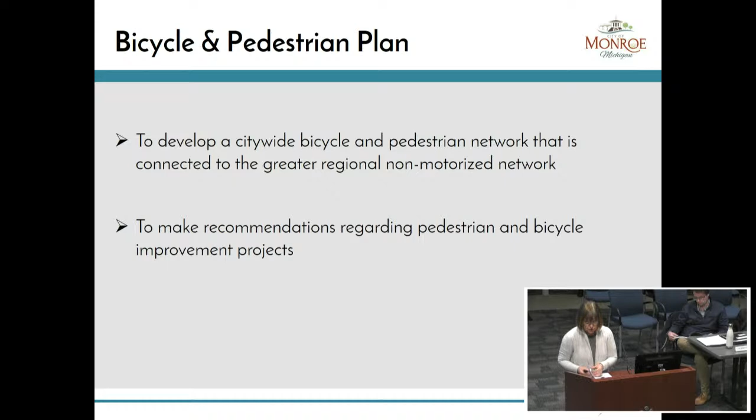5-year plans have a specific format they have to follow per the state. They need to include a community description. They need to describe the administrative structure of the city as far as how you operate parks and recreation services. And there needs to be public input. You have to set some goals and objectives and have an action plan for the 5 years.

This Parks and Recreation Master Plan is very similar to your last one, which I was also privileged to help you with. But it also brings together all the initiatives you did in the most recent past, including the update to the River Raisin Heritage Corridor East Master Plan, the Downtown Plan, the Riverwalk Improvement Plan, and brings together more up-to-date park development plans that you had started in 2017.

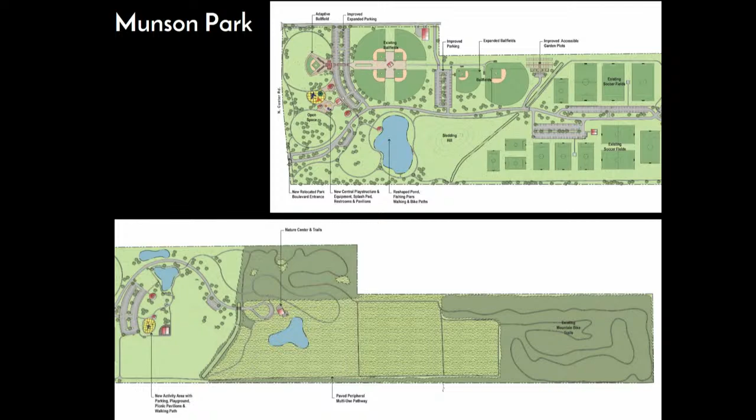Munson Park—I will not give you all the details, I know there's a lot of details in this plan, but if you have questions I'll gladly answer them. The plan for Munson is really to keep that open atmosphere at the entrance, to change that entrance and create more of a natural look, upgrade the playground including some adaptive ball fields, and create more trails in the back and in the park in general.

Soldiers and Sailors—expanding and extending that river walk along the river, connecting it to the River Raisin National Battlefield Park.

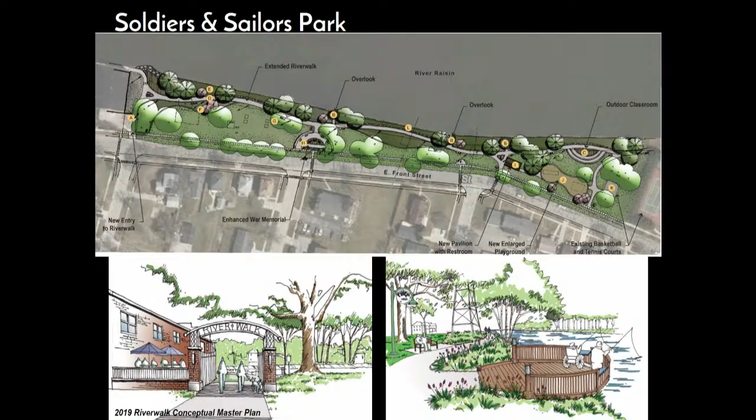There are also plans for your neighborhood parks and other pocket parks or River Raisin parks, and some of your parks that are not developed yet—so we have Mill Race, Manor, and Cappuccilli highlighted here.

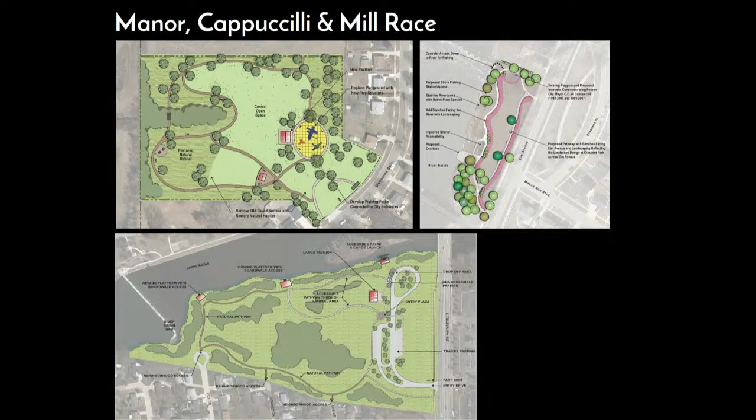And that's about it for the Parks and Rec plan. I hope that's enough for you, but I want to spend a little more time on your first citywide bicycle and pedestrian plan.

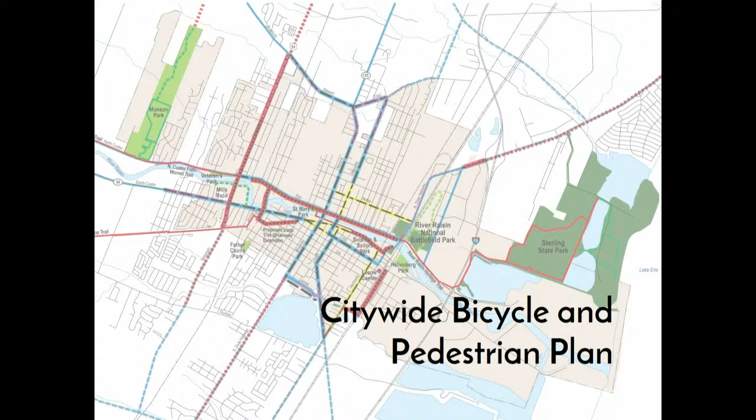In 2020, voters approved a 15-year millage for roads and trails. There's been a trail advisory committee, and I'm glad to see Peter was able to make it tonight—Peter is the chair of the trail advisory committee, and Andrew was able to serve as well. We've been meeting for about a year, going through this plan and planning for a citywide system in order to make recommendations to you to consider.

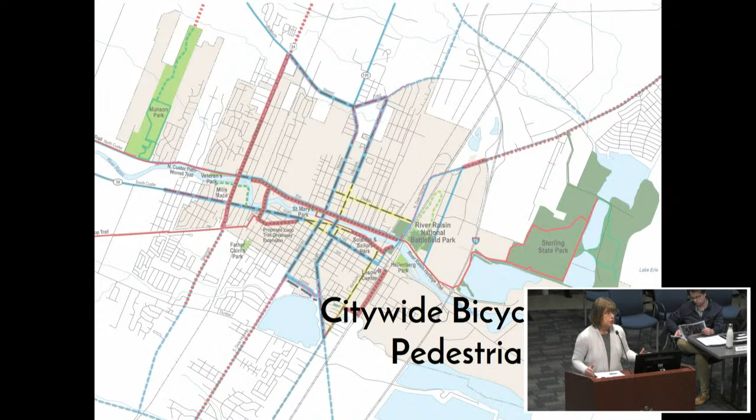So there's been a lot of work done here, and what I'm trying to highlight is just a few things. A key component of this was to make sure the city is connected to a regional network. Let me highlight that regional network a little bit for you.

But first, Monroe is truly unique, both in itself and regionally, because it has access not only to many local parks, but also to a state park, a national battlefield park, and an international wildlife refuge—all within city boundaries and all within walking and bicycling distance from most city residents.

When we start looking at Monroe, we are disjointed—we're not connected to that system. We do have a regional trail, and that regional trail is recognized as the River Raisin Heritage Trail.

In looking at each of those, you can see, for example, if you look at the River Raisin—and I'm going to invite you, you're looking at it, right? I didn't even realize that. The River Raisin Heritage Trail, you see the challenge that I was mentioning.

In the center of town, it's a sidewalk. It's not really a separate recreation trail, if you will, that's 10 feet wide. So there's a need to incorporate that, and you also don't have bicycle accommodations, and that needs to be said. I do ride there quite a bit myself, and you end up riding on a sidewalk because I'm way too scared to go on the road, frankly. But some people do ride on the road, and they are brave.

If you look at the Monroe Loop Trail, it starts at Munson Park and ends at Rossler and Fifth. Continuing the Loop Trail and connecting it through to downtown is something that's really a need.

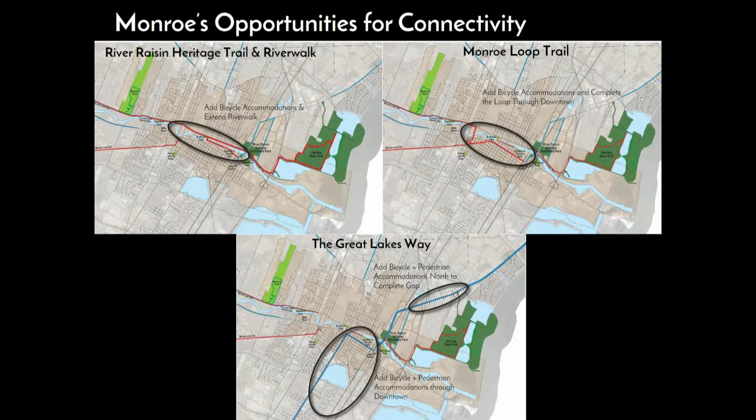As part of that effort, we did a survey of residents, for both the parks and the bicycle improvement plan. We found out a few things, and those are there for you to see, and they're also in the report that was distributed.

Generally, people want bike lanes. That was pretty clear—they want bike lanes in certain places through downtown, but everywhere was something I read quite a bit, along the river, and on dedicated off-road path and protected bike lanes. I think most people want a safe way to do bicycling in town.

We started looking at north-south corridors and east-west corridors, just highlighting a few that were mentioned. And other improvements we could do too: bike racks, hiking trails, continuing to allow bikes on sidewalks. That also speaks to how safe it is to be on the road. There was quite a bit of that conversation in our committee about how safe we felt about going on the road with on-street bicycle facilities.

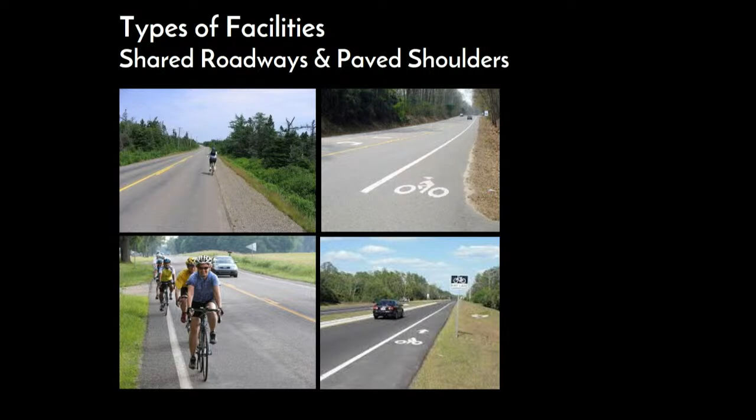As far as types of facilities, they come from many angles. The first one is no improvement whatsoever, and that's appropriate in certain areas, not in the city, primarily on rural roadways where there's very low traffic. That is safe if you have a little space, and hopefully a paved shoulder, which makes it safer because you have a dedicated space if you're right on the roadway.

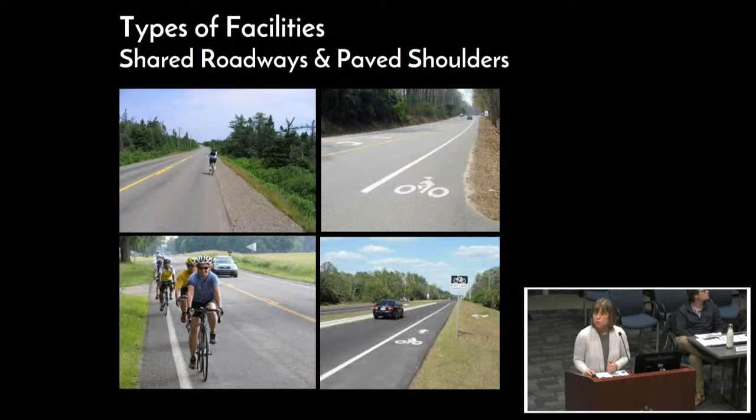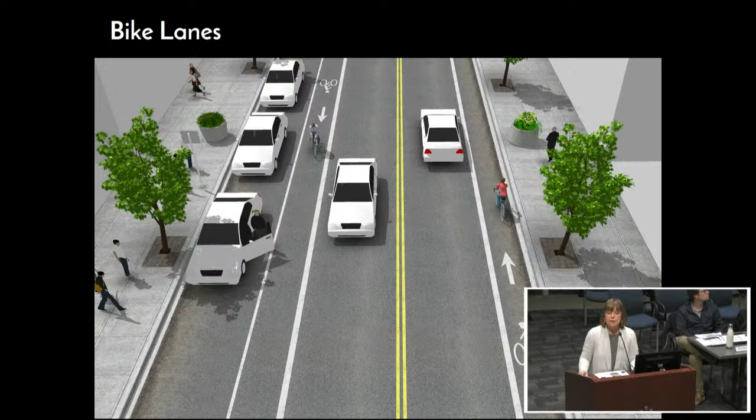But in cities, we start thinking about accommodating bicycles with bike lanes, and those have to be a certain width. Sometimes you mix parking with car traffic and bike lanes, as in the graphic I just showed.

There are different ways to make that safer. Rather than just having a straight bike lane, you can have protected bike lanes. They come up with ideas all the time about making this better, but it takes more room, so we have to be cognizant of that.

Buffered bike lanes are in the upper left, with bike lanes on the right. You see some kind of barrier that allows more separation, or planters, or just strictly a buffer. You notice the buffer is in between the traveling cars and the bike lane, and then you have the parking lane. In the lower example, you see there's parking, a buffer, and then the bike lane.

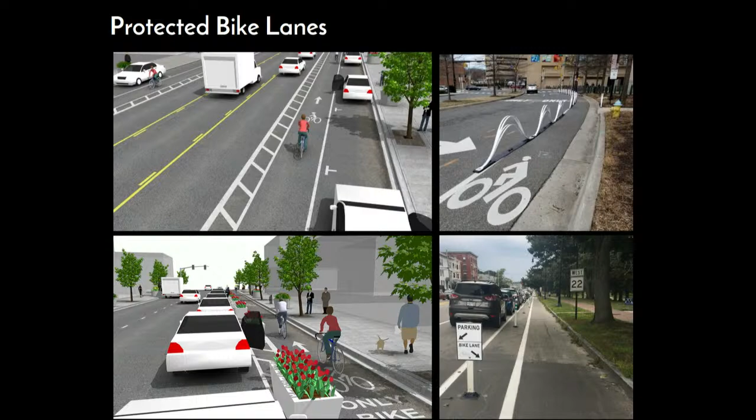So there are two types of protected bike lanes in that sense. If you look at the protected bike lane on the sidewalk, it's really an extension of the sidewalk, and that could be something you could imagine for Monroe Street. Wouldn't that be wonderful?

In addition to those protected areas for designated bicycles, there are areas where there's just no room for accommodating this. So you could think of a system that has bike lanes, but when you come to an intersection where there's a need for a turning lane, it becomes a shared lane situation. Those are accepted as far as standards, and the symbol you see on the pavement, that's what it is—it's a sharrow, a shared lane marking.

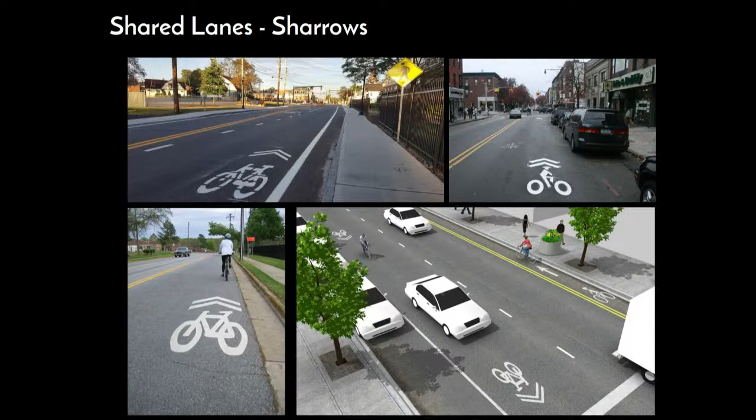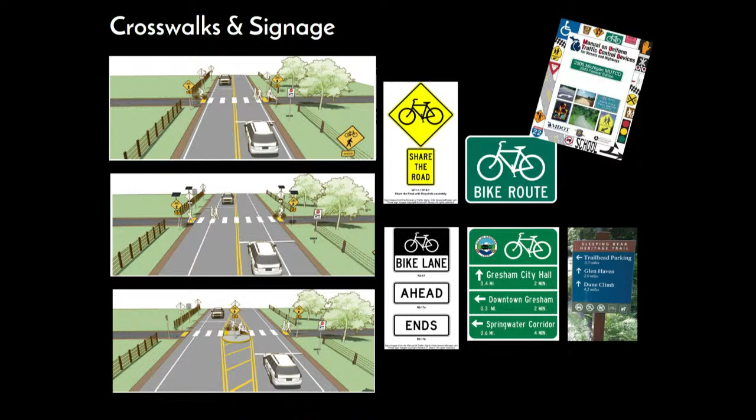In addition to on-street bicycle facilities, there's also other things you need to think about when looking at bicycle improvements—crosswalks, signage, and all those other amenities that need to happen around the city, plus bike racks, bike stops, bike stations, and the fix-it stations that you have in many places in the city right now.

So these were a little bit about standards. Now I'm going to talk about the plan itself, and the first thing we did is look at what we have.

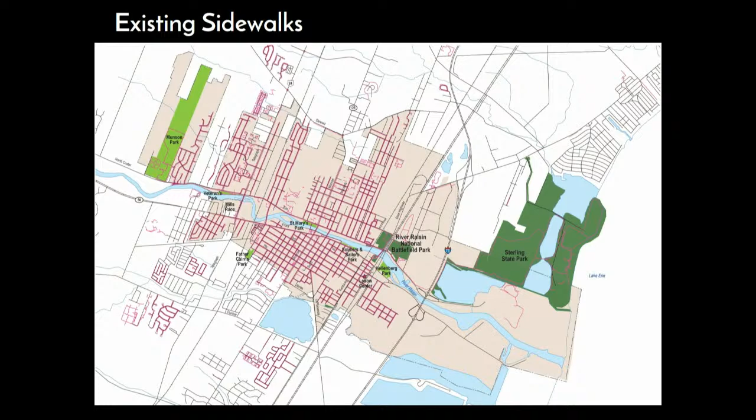That graphic, that plan, is really what you have in terms of existing sidewalks. You do see you have a great deal in Monroe. As far as bikeways and shared use paths, you do have some, highlighted in red here—the shared use paths are in red, and in blue are your bikeways. Within city limits, you really have a bike lane on North Dixie and Detroit Avenue, as you may know, and then on North Custer.

There are paved shoulders outside of town coming into town, and that's what you see over here, along M50, Monroe Street, and North Dixie. Then you have your river walk and the Monroe Loop Trail highlighted in red as if it's existing—it is almost existing.

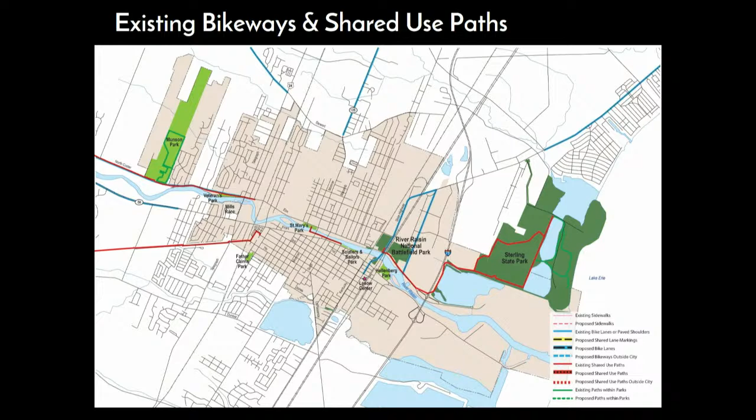The plan, the proposed bikeways—the plan itself is in two pieces, so the first one is the bikeways. What you see in bolder blue is what we are proposing. We're proposing to connect the dots, really, connect them and make sure the system is continuous and interconnected.

As far as shared use path, we are anticipating what other plans have proposed, as well as connecting dots again. So you have a planned shared use path along Telegraph, shown here. You also have plans for a greenway in the River Raisin Heritage Corridor East Master Plan, highlighted here. The other ones are part of connecting those opportunities I mentioned a little while ago, along Elm Avenue, and finalizing and continuing that loop—the Monroe Loop, downtown and on Rossler.

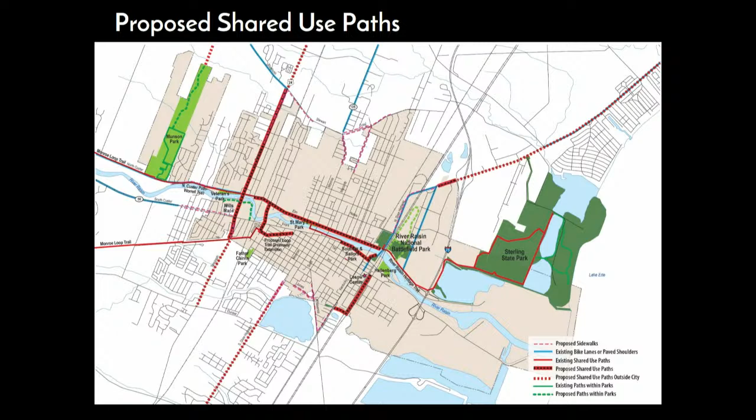So we looked at how that could be accommodated and the recommendations and how we can implement those within your existing street system. We measured the streets and looked at how we can put protected bike lanes on your existing roadways. So just a few examples: West Front, East First, and South Macomb can all accommodate protected bike lanes and two travel ways.

This has a trade-off that's pretty obvious to everyone here, I'm sure: we have to remove the parking on those streets. We have to say there's no on-street parking along those arteries.

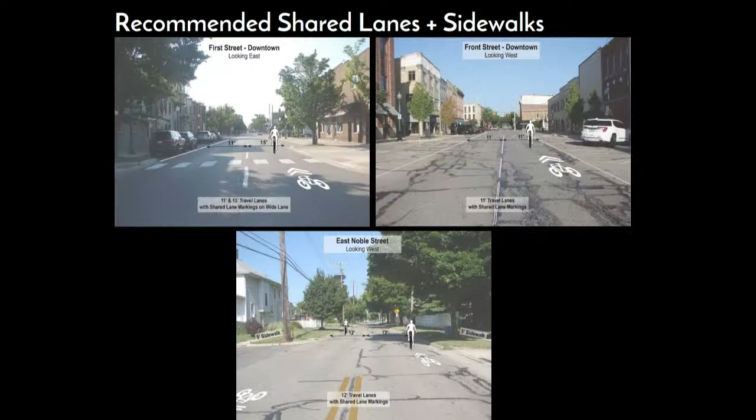Recommended shared lanes or sharrows, in addition to the existing sidewalks, are for places where we don't have the space, or where the traffic and speed are so low that it's safer to do so. So downtown is really right now thought of as a shared lane situation.

Noble Street is also thought of that way. What's happening downtown, I think, is going to be rethought in the near future in terms of the one-ways versus a two-way situation. When you do get there, I think it'll be incumbent with this complete streets mentality to think about how we're going to incorporate bike lanes or make it safer for bicyclists to go through our downtown.

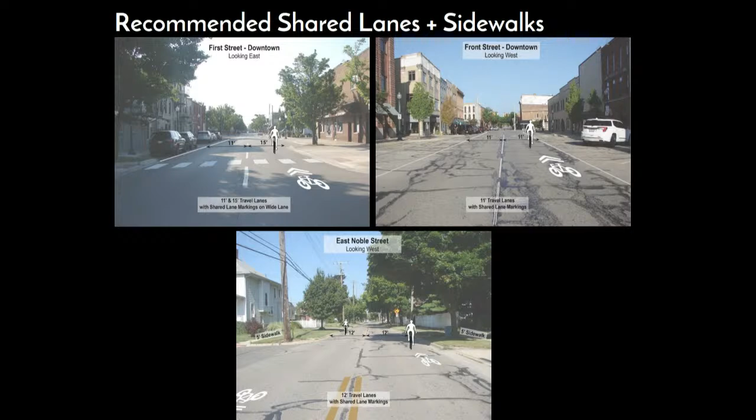Also, there are areas where we can and should afford to have both bike lanes and a shared use path. There are people who will never, as I said a little while ago, go on the street on a bicycle—they just are not comfortable doing so. So I think we need situations where we offer both a shared use path along the edge of the road as well as on-street bicycling, so that you can have that happening.

You also need to think about that particularly with your River Raisin Heritage Trail, in terms of offering a continuous trail from the state park all the way to the Monroe Loop, et cetera, to make that a complete wide trail use.

And in fact, if you could afford 12 feet, that would be awesome, but many areas won't have that width. So you should think about 10 feet at least, more than just a strict 5-foot concrete path. That way you can have a mixture of use, with greater use by both pedestrians and bicyclists mixed together, because what we're trying to do is attract people here.

So those are situations where there's both bike lanes and a shared use path along Elm, connecting Rossler to the loop, both north and south of the river. Yeah, that's what I'm showing—in addition, there's a shared use path.

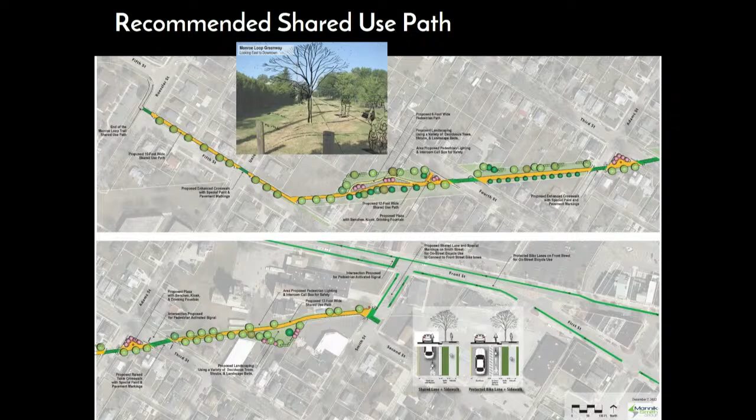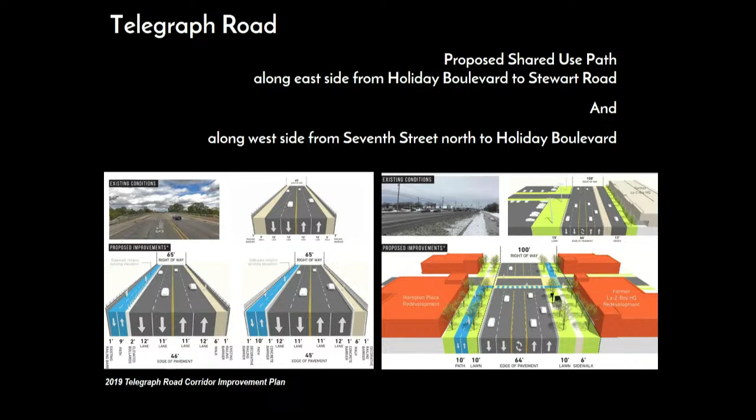Finally, I did talk about this too. Telegraph Road and Monroe Street are part of other plans. We didn't spend a whole lot of time thinking about that because it's already been planned—there is a plan for a shared use path on Telegraph Road, both south and north of the river, largely on the west side, crossing over at Holiday Boulevard and then going east to go north. Hopefully both Monroe and Frenchtown will come along with this plan and continue it both north and south.

Monroe Street has an option to create a bike lane there, and this is really what our committee would like to see.

What we'd like to see is the bike lane against the sidewalk, the idea of having the protected bike lane close to the pedestrian, then a buffer, then parking. This supposes you're on board with reducing the number of lanes through downtown, which in my opinion would be a great thing to do for Monroe.

So our priorities, and I've got only 3 slides, I hope I'm not taking too much of your time. First is to create those bikeways through town, connecting the dots.

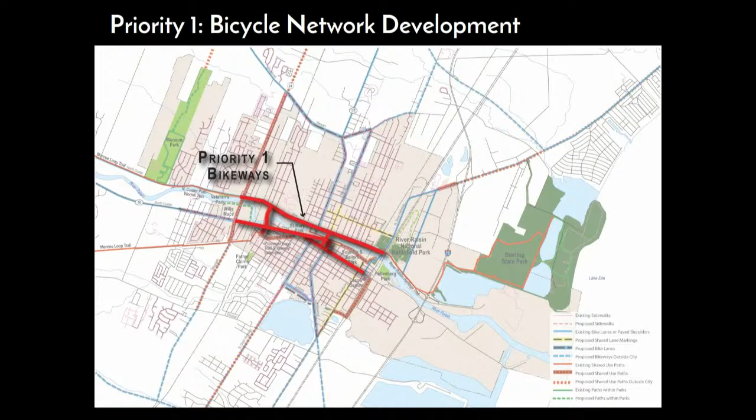Excuse me, could you go back to that previous picture? Sure, you've got Monroe Street there. Currently Monroe Street has two lanes going north, two lanes going south, and a turn lane.

Now, if I understand and read this correctly, you're proposing there would be only one lane going north and south, with a turning lane in the center, a bikeway, and still a parking lane. Is that correct? That is what's shown here.

That's part of the downtown plan. But what I'm suggesting is that we reverse the parking lane and the bike lane, so the bike lane is against the sidewalk, then a buffer, then a parking lane, then your 3-lane roadway with a center turn lane.

So you're trading 4 drive lanes for 2. Correct. The idea is not to move traffic faster, the opposite. Well, I can assure you with 2 lanes you're going to slow traffic down. Yes, and in fact it was pointed out, is that your intent? The intent is to accommodate bicycles.

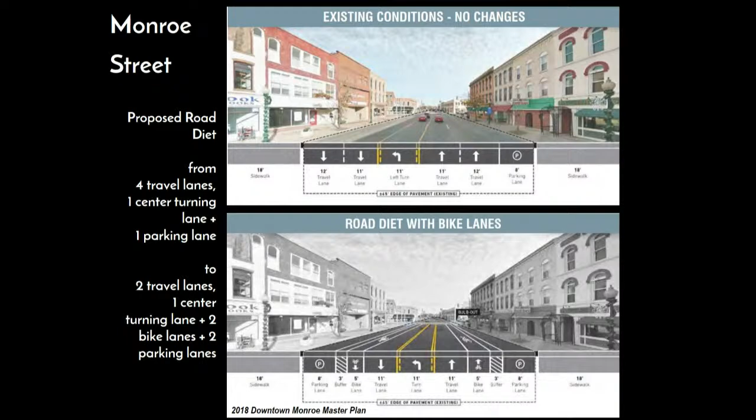There will be reaction, no question. But I do think there are ways to implement some of these changes by trying it out, seeing if it works, and adjusting and learning from what we try. But if we don't try anything, we're not changing, and I don't think that's good either.

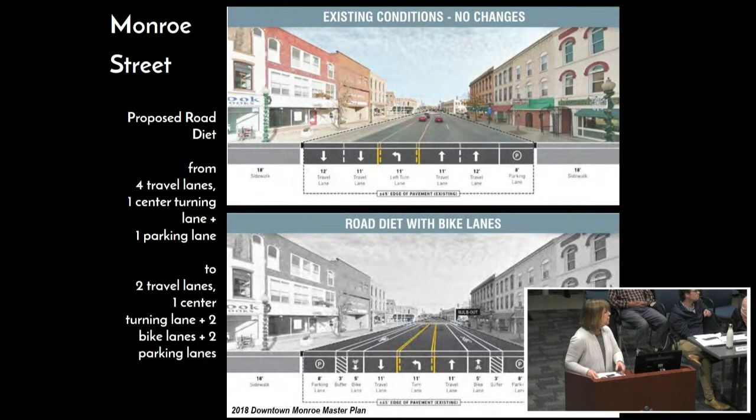So just moving on, I want to focus on the recommendations of the plans. Our number one priority was really to create those bikeways, connecting them together and creating a city system that's interconnected for bicyclists to use.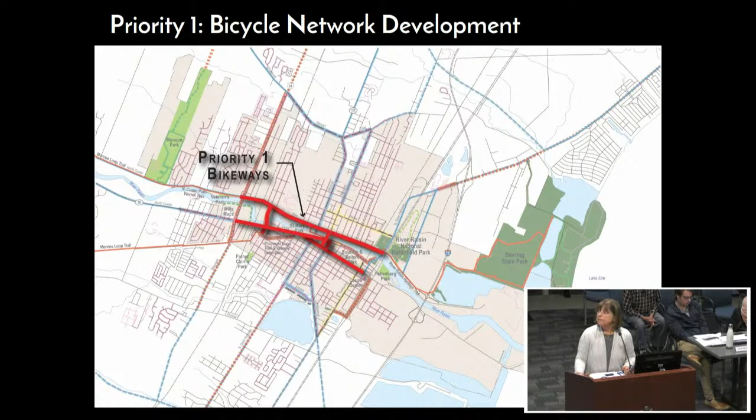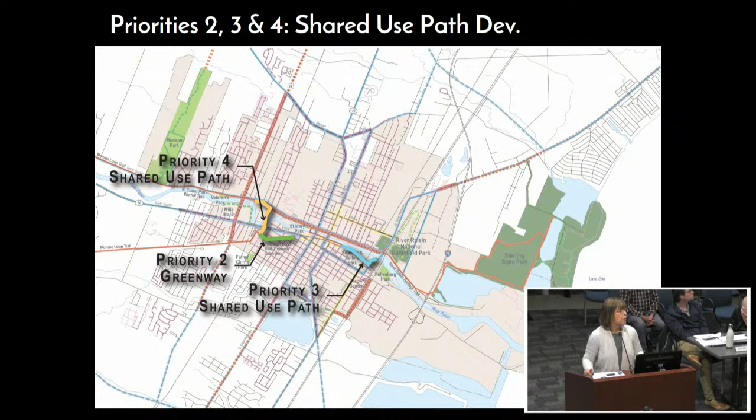So that's it as far as my presentation. I do want to say that I will be coming back to both the Plan Commission and City Council in January. This is just the first approach, and as part of the recreation plan submittal, we need to have a public hearing and resolutions in place. So I'll be back before you to talk about this. There's also a public review process starting this week for a whole month. You're welcome to send comments to Vince and to us, and we could make changes. This is just a draft.

That's it, so I'm opening it up to any questions or conversation or comments. Mr. Pastor, before we get started, Chairman Schwartz may have questions for his commission as well. Are you looking for questions and answers at this time? I know from the timeline for this evening, just a general view versus the details of working it out, but there's a lot of information here—it's many pages, 130 some pages.

This part alone with the bicycle and trails, I really appreciate some of the information because I like how you at least showed how those systems would be presented on existing streets and existing conditions. How they work out is through the discussion and implementation through phases, as you said, what's the priority and what's next. And also in here, I know we didn't go through all this, but there's a page that has the...

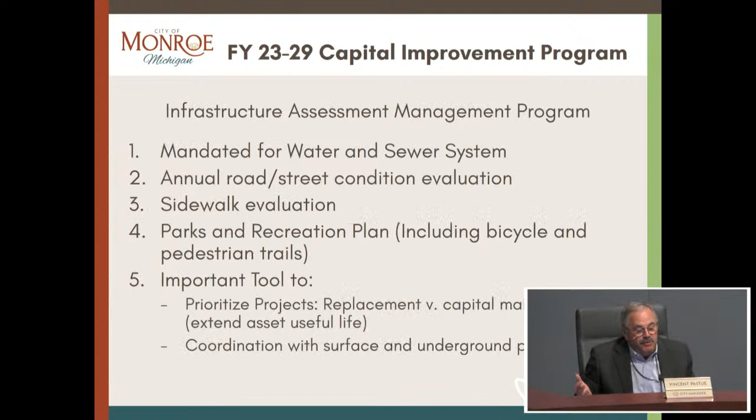And then you're always looking at other funding alternatives to go along with these projects. As I mentioned in the past, and again, the infrastructure asset management mandated for water and sewer. Mr. Lewis does an annual assessment of not only the streets, but also sidewalk evaluation, Parks and Rec Master Plan, which includes the bicycle and pedestrian, are elements of taking a snapshot, an assessment of where we are and how we can plan to make necessary improvements. And it's an important tool to prioritize projects, replacement versus capital maintenance, extend the useful life of an asset, but also coordination with surface and underground projects going along with that.

Regulatory factors, primarily going to be utilities, water system, heavy emphasis with the state on reliability and redundancy, PFAS, ongoing monitoring of that. And then our sewer system that we are involved with Monroe and Frenchtown Township. We have a consent corrective action plan with our NPDES, National Pollutant Discharge Elimination System, that we have to address, and those are incorporated into the projects themselves.

Technology factors, again, always looking to improve operational efficiency, customer experience, system reliability, and safety as well. The information technology study from probably about four years ago, improve our process management and workflow systems, which have been taking place. We have numerous applications and improvements that have taken place in the utility system from metering all the way to collection over the last few years.

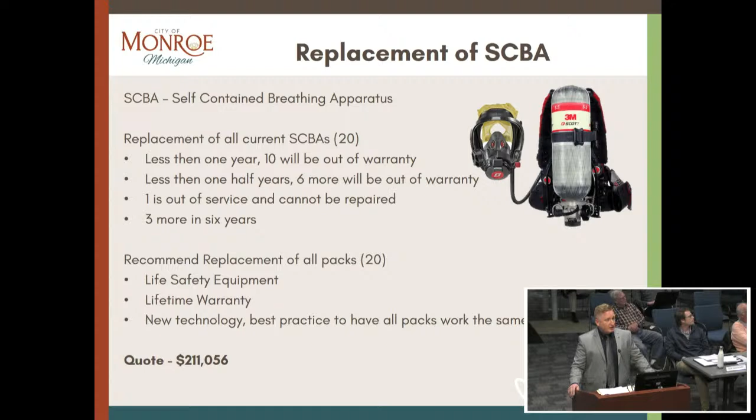Next item is the accident investigation team equipment. Currently, the accident investigation team - think of what these police officers do when they're called out to mostly tragic scenes, when somebody is injured or killed as a result of a motor vehicle or railroad accident. These officers are trained, going through an initial two-week school with continuing training, to determine cause and contributing factors within any accident within the city of Monroe.

The current software we have is out of date. The current hardware is unsupported and out of warranty. The computer we're using for it doesn't handle new equipment if we were to buy new software or hardware - we checked with IT concerning that. This also requires multiple people to operate what we currently have. So you see the recommended replacement of all hardware and software, because if this were to go down, we don't have a replacement system for it, and it cannot be repaired. The software is not supported any longer.

So you look at some of the costs there - it is costly for this equipment. The training is one area where we may be able to cut costs. I've already spoken with Sheriff Goodenough, who is also looking to go to the same system, and we could share the cost of that training, cutting out about $2,700 roughly with this project. This also can cut down overtime costs, because most of the time these incidents do not occur when we have sufficient staffing to investigate them - they occur after hours and we have to call in multiple members. This device can actually be used with all this equipment by one person.

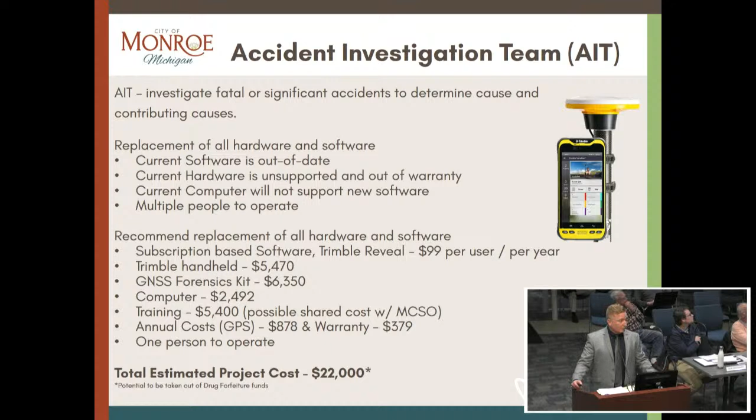Next project is the taser. So currently all sworn officers, with the exception of one, have a taser issued to them. Half of them, 11, are unsupported and out of warranty, with no software or hardware updates available - so if they break, they're not going to fix them. We're looking to replace the ones that are out of warranty and out of date with the current model, which half our department already has. They're upgraded, warranted, and improved technology.

This was explained to me by the persons who oversee this project: it's a smart tech pulse rate, and the older models have a different pulse rate than the new ones - it's much more controlled, advanced technology. The technology also stays powered on and recording. Current tasers, the older model, will only record activity if it's fired - it won't record if you just turn it on. These new ones record activity when turned on, which can help prevent false claims and track activity. So anytime you turn that taser on, that's a recorded activity within the taser.

Also, there's potential to work in concert with our body-worn cameras, which will be the next project I present to you, and how that would operate. So this project, estimated project cost about $22,000.

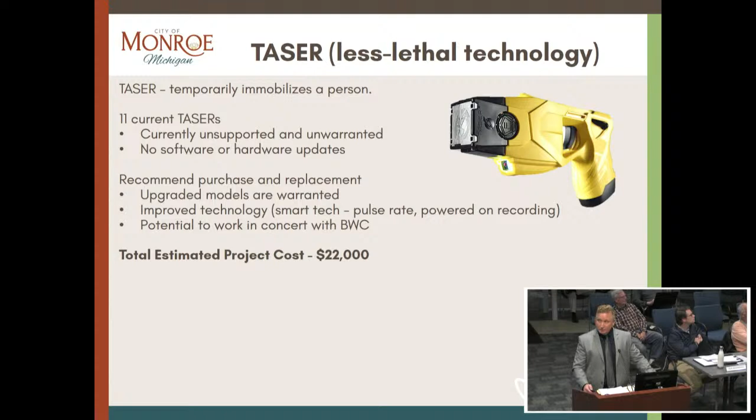So the body-worn cameras, this is actually looking for in the following year's CIP projects. Our current licenses, we use provisions for our body-worn cameras and in our cars. Those licenses will all expire around November of 2024, when we last looked - I might be off a year there, my apologies. But when these expire, we'll be looking to replace them with something. We looked into the Axon body-worn cameras, and when I say they can work in concert with one another, if you take out your taser and it's turned on, it'll activate the body camera.

This prevents split-second type activity by the police officers who would have to react very quickly. They wouldn't have to turn on a body camera and then pull a taser. This all works in concert with one another. They would activate the body camera, activate the car camera. In addition, with Axon technology, if the officer even pulls their weapon, it would activate the body-worn camera as well.

This cost includes both police and fire. We'd be able to get helmet cams for some of the firefighters as well, and put working cameras back into the fire engines. There is a cost savings with this, considering the reliability of such software and hardware for officers today. It's must-needed technology for officers today.

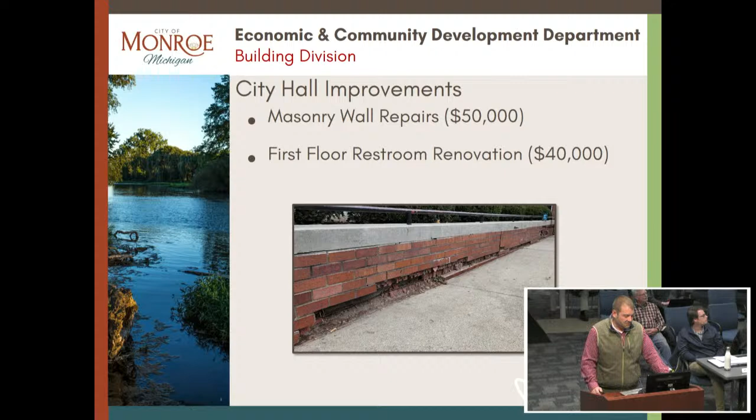Next is 2 projects submitted by the Downtown Development Authority to further the master plan that the DDA and the City Council has adopted. The first is to take a look at the 2-way conversions of First Street and Front Street, and also the Monroe Street traffic calming and streetscape project we saw earlier, included with the Bike and Trail Pedestrian Master Plan. The DDA has submitted these 2 projects to further look at and design in the upcoming fiscal year.

Yes, Councilman Feller. Thank you. Can we go back one, Mark? What portions of these projects would those funds correspond to? The 1-way to 2-way conversions for First and Front Street would be from Harrison to Macomb Street, where those streets are 1-way, converting both back to 2-way streets. Right, but you have a $1.2 million allocation on that total project. This right now is just $60,000. Is this for the plan? Design phase. Gotcha. Yep. Same for Monroe Street as well? Correct. Gotcha. Yep. Thank you. You're welcome.

Next, in the Economic Development Division, we've got some funds requested for strategic property acquisition to further the River Raisin Heritage Corridor. As you know, we've made significant progress with the DNR Trust Fund since 2014, so we've got $500,000 requested to continue property acquisition within the Heritage Corridor. And then also $300,000 for property acquisition to go along with the Telegraph Road corridor development plan that we've discussed with City Council in the past.

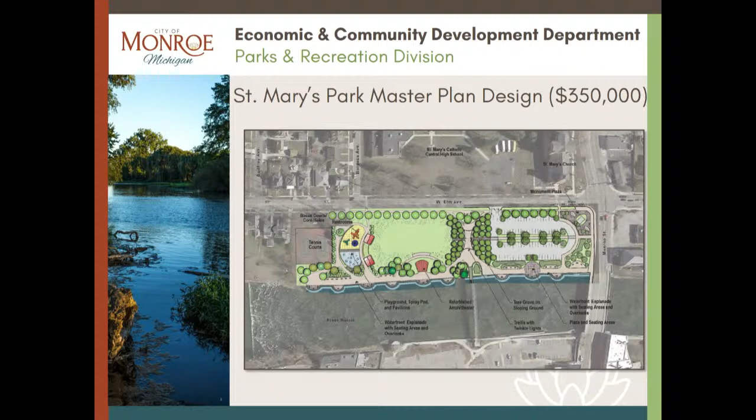So next year we're proposing to complete the final design and then also start applying for grants to help offset the cost that this park is going to be. And that's all the projects that I have.

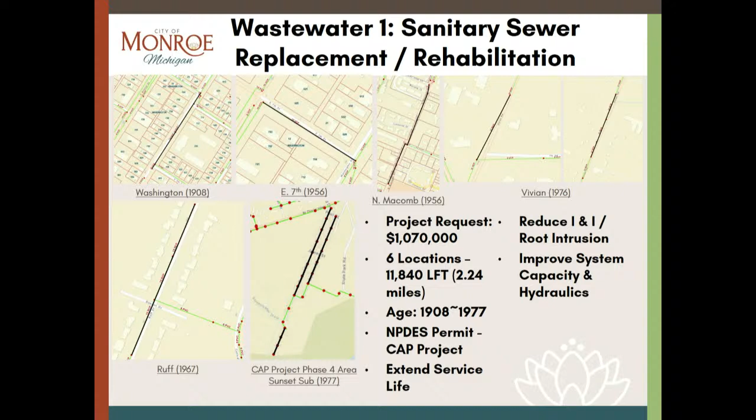That is in the Sunset subdivision out in Frenchtown. There's almost 12,000 lineal feet that we're looking at rehabilitating. The age of these mains range from 1908 to 1977. As the city manager pointed out, our NPDES permit dictates this requirement for the corrective action plan, or CAP program. Rehabilitating them will extend the service life, remove inflow and infiltration, and improve the system capacity and hydraulics.

Second ranked project is a multi-year funded project. We thought we had this funded, and then with high inflation and long lead times, the cost went up almost double. Actually at the last council meeting, you awarded the purchase of the generators. They have a lead time of almost 50 weeks. So we're a little over 50% design with the project, and we're requesting an additional $500,000 for the construction component.

Again, these generators are about 50 years old. They serve as emergency backup generators. Our permit requires us to have a secondary backup source for power. These 2 lift stations, the Sunset and Detroit Beach Station, are the 2 biggest in the system. They service virtually 100% of Frenchtown Township. Parts aren't really available for these, and they've had a lot of maintenance and repairs.

Third ranked project is fronting about $100,000 for a state revolving fund loan that we're proposing to apply for in fiscal year 24-25. It's made up of 6 major areas. We're proposing to combine 4 phases of the corrective action plan to accelerate that and get ahead faster than anticipated. There's about 10,000 lineal feet of sewer to be lined, about 115 laterals to be lined, that's the service leads up to your house. We'll be removing any type of defects, downspouts tied in, catch basins, that type of thing, and removing clear water. That's the goal with that project.

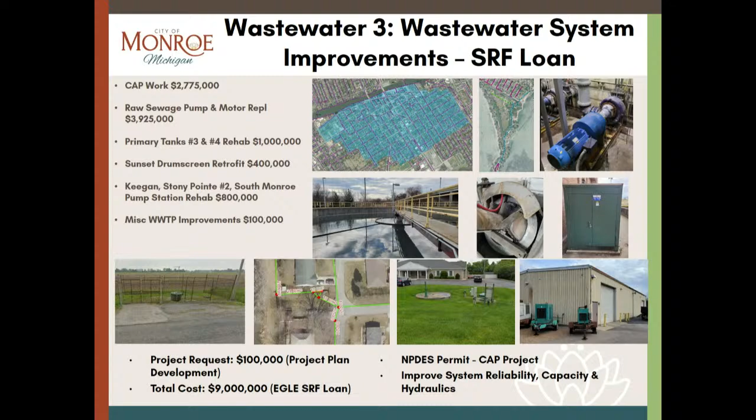The next project is a water filter we'd put on our wastewater effluent line as part of one of our processes. We desire to use our wastewater effluent for treating and cleaning part of operations. Currently we have to use potable water, which is a higher cost, so we would propose to put this in and have a payback of less than 6 years to make up for those funds.

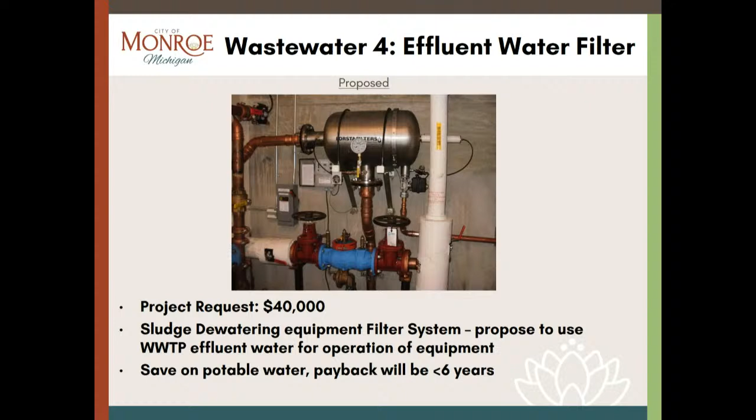Moving over to water, on water distribution. The first project is our water distribution replacement and rehabilitation program. It's a little more than $1 million request. It has 3 locations, all coordinated with a road project. The ages range from 1915 to 1955.

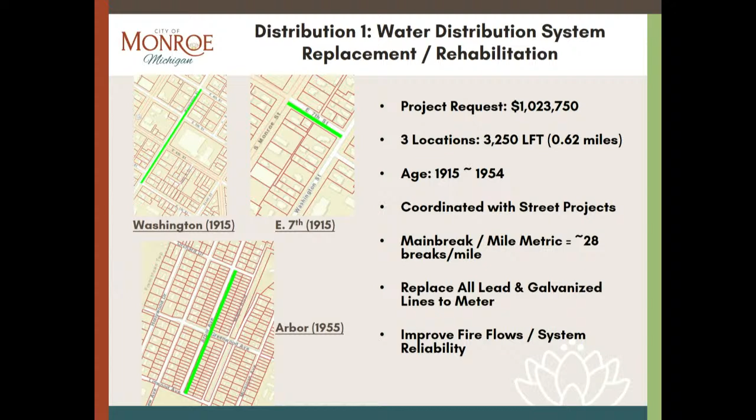We use a metric for determining how many main breaks per mile. That's a pretty standard industry way of tracking whether to make a decision to move forward with a replacement. These have about a 28 main break per mile average. We try to keep it at less than 10 if possible. With this project, we will also replace all the lead and galvanized lines, and it will improve system redundancy and fire flow.

The next project is a 24-25 fiscal year request, but it would be fronting about $400,000 for the survey and design. We're looking at an $18 million bond, which would include 37 locations for replacing water mains, just under 11 miles. About 13% of the 11 miles is in the city, 70% is in Monroe Township, and 17% is in Raisinville Township. We'd be replacing old 6-inch and 12-inch mains and replacing with new 8-inch and 12-inch.

Since 1983, we've had 274 main breaks on those different sections. The main break per mile metric ranges from 0 to 123. The reason why it's 0 is because there are some looping areas we'd have in there, so those mains don't exist yet - it's just a technicality. But the 123, these are the highest and worst we've had in the system.

We'd replace all the lead and galvanized lines there - there's almost 90. And the age of the pipe is from 1922 through 1990. So this pipe is as old as the water system when we purchased it.

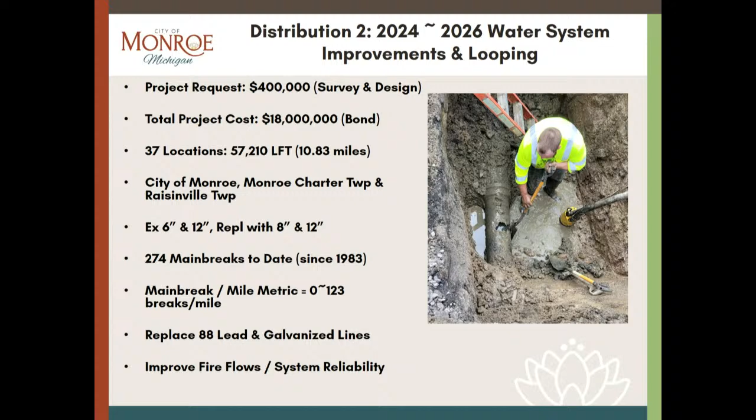If I might just mention that it is a big number there, the $18 million bond issue. And when we were looking at future projects, you take this one and the 14.5 million I think we had for the police station, along with other road and water and wastewater projects - that's how you get to 45 pretty quick. So it's a big project. I know we've talked about it before with the council, but it does encompass areas throughout our water distribution system outside the city.

Okay, moving on to the water filtration division. This next project is a little over $1 million request for a multi-funded year project. This project is 95% designed. We were ready to go out for bids, and then we got the engineer's updated estimate, and it went up to $1.9 million.

This is a regulatory required project. We have to add an additional pump. This is the South Custer Booster Station. It's just on the east side of the fairgrounds. It increases the pressure for the western communities in our system. Basically, Raisinville Road West all gets serviced with this station.

So we would have to do a building expansion. We're going to replace the backup generator and communications. So this would get us to the point where we'd have the estimated cost based on the engineer's estimate to move forward.

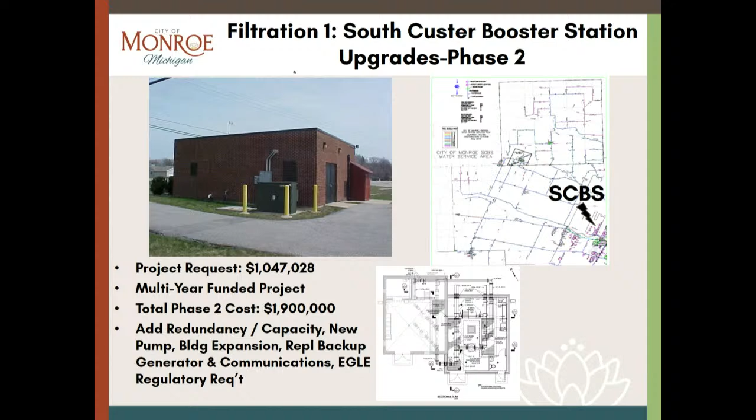Next project is some vibration and temperature monitoring equipment. We've had a lot of pump rehab and repair and replacement in the last 10 years, so we're looking at trying to establish some baselines. This equipment is about a $20,000 request to install vibratory and temperature monitoring equipment on our high service pumps at the water plant to establish baselines, and we would be able to pick up on defects and deficiencies and then move forward with repairs on a minor sense instead of a catastrophic situation.

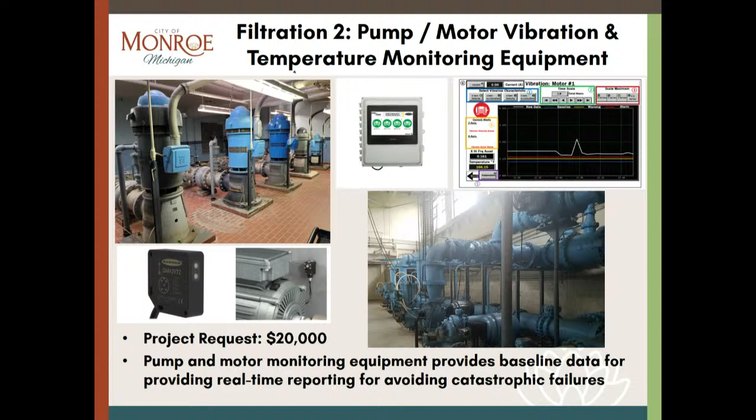The last project in the filtration division is a roof replacement over the filter building. This was replaced in 1993. It has a lot of shingle damage and repairs and maintenance, so we're proposing to replace that to maintain the structure integrity of that building.

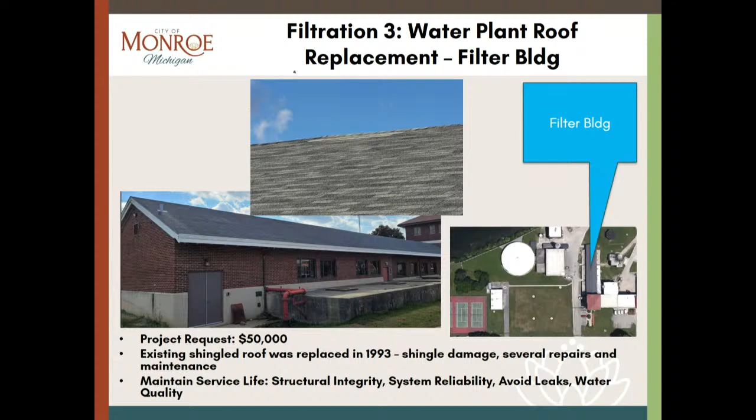Moving over to the raw water station partnership. The first project is very similar to the high service. This is the same type of project, but it would be on the low service pumps for installing vibration and temperature monitoring equipment, to serve the same purpose, to help us establish baseline information to make more educated decisions, and when we'd need money sooner, instead of doing more reactive, we'd be able to program it a little easier. That's the idea here.

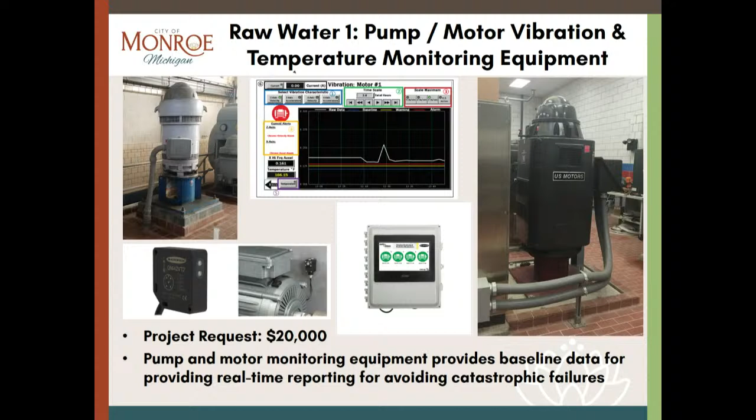Next project is a multi-year funded project for pump rehab, motors, and variable frequency drive upgrades at the raw water station. Most of these pumps we're looking at upgrading are on the 1948 side of the plant, or the facility out at the station. The goal is to maintain the capacity and efficiency of those pumps operating to serve both the city of Monroe and Frenchtown Township. It's a $35,000 request.

And the last project is a multi-year funded project. It's a contribution towards the additional raw water pump that we've been trying to move forward with. We started design, and the engineer's estimate came back much higher due to an electrical upgrade that wasn't anticipated. So we are going to go through a few more requests for getting the funds to move forward with the second pump. The goal is to meet our plant capacity with being able to pump raw water at the same capacity as the plant. It's our firm capacity we're trying to get to here, and that'll give us the redundancy and reliability we need. So with that, is there any questions?

I got a question. It seems like I got a lot of them tonight. Of all the projects you went through, and I guess this goes for your predecessor also, of all the projects you went through, how many and what are the ones that you must have, and which ones we really would like? Out of all these? Interesting, because in a couple more weeks you're going to ask us to approve a budget, which I sure as hell don't know where these numbers come from.

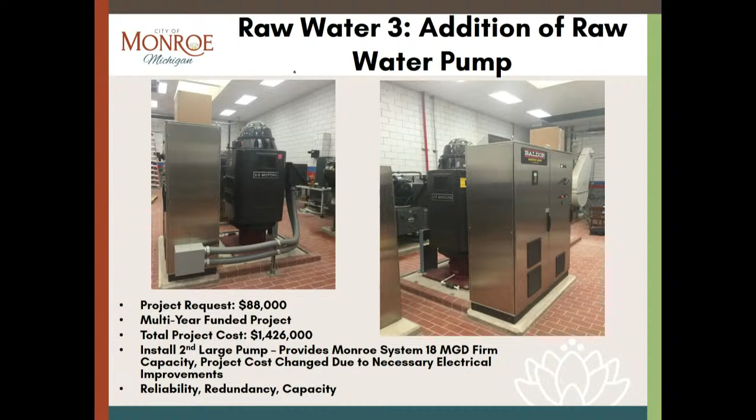About 3/4 of these projects are regulatory driven, and tied in with those are road-related projects. If you don't fund those, you'd end up putting a brand new road over a water main that hasn't been replaced, and Patrick absolutely loves when I dig up his new roads. So that's what I'm trying to avoid. But the regulatory ones are a must. The bond projects are desires, but on equipment that needs to be done.

I was thinking about putting a different screenshot with all the main breaks, it tells you a bit more of the story on where they're at. But that's where we're focusing - we're trying to minimize emergency repairs outside the city, and that large bond is the way to go on it.

With interest rates going up on bonds, the state revolving fund is the cheapest option right now. That's a 2.5% loan, whereas a recent bond was almost 5%. So anyway, that's all, thank you, Barry.

Educate me a little bit - is the emergency repair work done with a staffed crew, or is that contracted out? Yes, that's with staff. So that would be like a water main break, staff are dispatched, and that's 24/7, whether it's during the day or Christmas Eve. So that's how that usually works.

So these projects would then cut down on a lot of that? Absolutely, yeah, we would cut down on a lot of emergency repairs, yes.

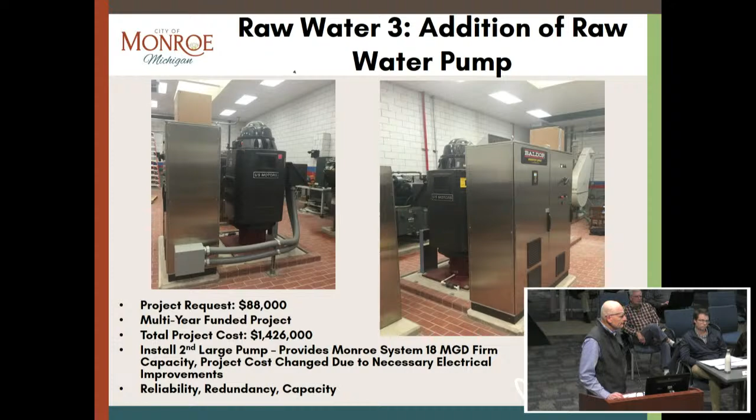Barry, you showed a picture of a water main - we were talking about lead in it, in a mud hole right there. That was on East Elm Avenue, right across from the battlefield. Is that a lead pipe? That's a cast iron water main. It blew a hole right out to the main.

Are there a lot of lead pipes still in existence being used in the city? Yes, they have to be replaced. We have to replace about 82 a year, based on our regulatory requirements.

Is the water being transmitted through those pipes falling within safety metrics? Yes, we just went through our testing - we have to do annual testing. Our 90th percentile was 4 parts per billion. Okay, thank you, that answers that question.

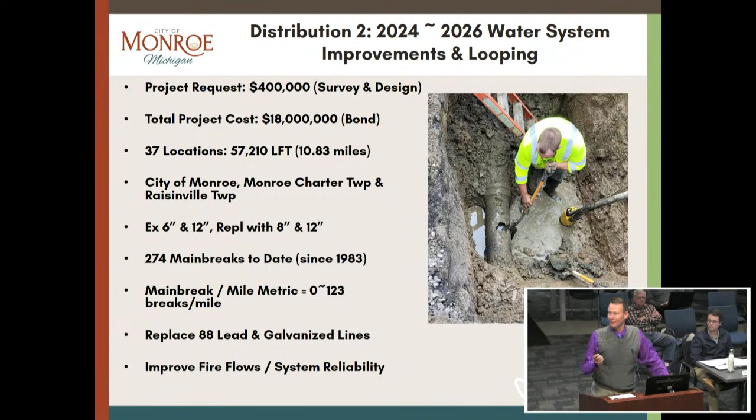Okay, I'm going to try to hold to 45 seconds per slide, so we'll see how I do. This introductory slide shows a summary of what we've got here.

We have 8 projects funded in the streets category for about $3.16 million. 6 of those requests are for our city-funded streets program, which will be bid through the city. 1 federal aid job is Macomb Street, which I'll explain later, and 1 other would be administered through MDOT, which we talked about at the last council meeting relative to the mast arm traffic signals.

You've heard this before in other years, but I'll briefly go over it for new folks. Every year we drive our streets - the Superintendent of Public Services, Assistant City Engineer, and I - and do a block-by-block rating. It's subjective to some degree, but we have guidelines: 0 to 10 for the road surface, with 10 being basically impassable and 0 being perfect, and curbs rated 0 to 4, with 0 being perfect and 4 being basically non-existent. That's how we weight the curbs versus the driving surface.

We also look at other things, like repair and maintenance history - are we cold patching that roadway a lot? Are there federal funds we can use on that? Those usually get accelerated in the schedule because there's only so many roads we can use federal funds on. And as Mr. Leroy talked about, we coordinate project locations with the water department. Sometimes we'll move one of his projects up a year or two because he can fund it that year, and sometimes I'll wait a year or two so we can fit it in with his, because I'd love nothing less than him tearing up a brand new street. That's the most important criteria.

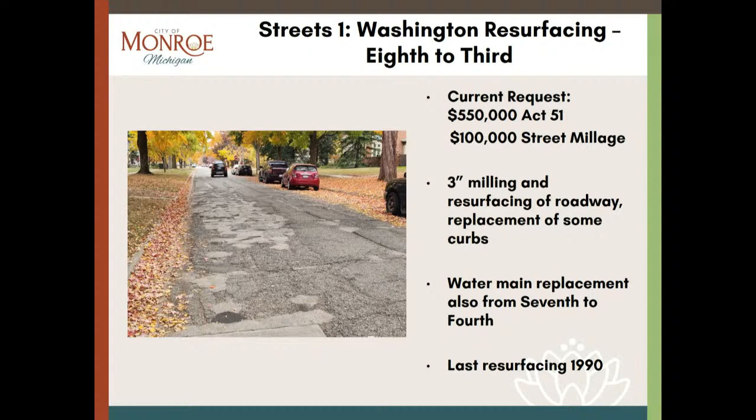We've already reached out to Monroe Public Schools to discuss how we're going to coordinate those projects. We're going to do the water main project during the summer, and they've said the resurfacing is probably less of an inconvenience. We cannot do both projects in 10 weeks, there's just too much work to do. So we're already reaching out and looking at those things.

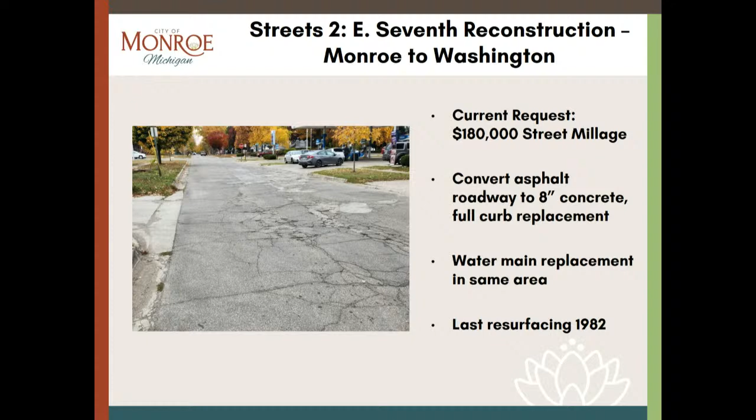Streets number 2 is immediately adjacent to that Washington Street project, but a little bit different. This has some base issues, and we need to do some regrading to make it drain properly. So we're going to tear it out and do it in concrete because it needs a full curb job. This was last resurfaced in 1982, so now we're at 41 years for this one. Water main replacement in the same area will replace the older cast iron line with a new ductile iron line.

Project 3 was actually on your list last year. We started working on it. It was probably the worst street we had last year. We got into it, realized the significant amount of storm work we had to do and significant amount of regrading, and realized we didn't have enough money. So here I am asking for additional funds.

What we also decided to do was have Mr. Leroy replace the water main between Tremont and Macomb. We were originally only going to do the street between Monroe and Tremont. We're going to extend that to the block to Macomb Street because we have to put the water main under the road, so it was marginal enough.

This is one of those where I accelerated that other block. We've mentioned this before - we are narrowing the roadway from 34 to 26 feet in the block between Monroe and Tremont. That is actually 2 feet wider than the section east of there. I know it was raised when we were first talking about this, on the non-motorized demands and needs like that.

This was not identified as a primary bicycle area, and it's very low traffic, so this is one area where we think those can be shared. Narrowing the roadway actually helps us out quite a bit on grading. There's a number of steep driveways near the farmers market area, and we're actually able to flatten those out by narrowing that roadway, which gives a longer run.

As I mentioned, this one will also be a conversion to 8-inch concrete with full curb replacement. This was last resurfaced, as far as we can tell, in 1955. The concrete section was newer than that, east of Tremont.

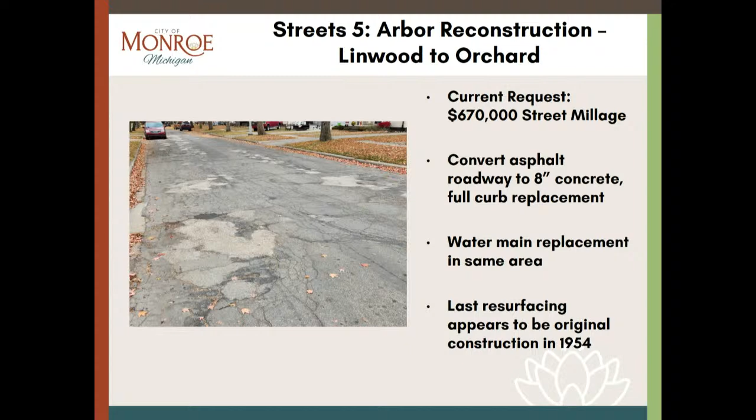This is another one where we're replacing the water main in that area. By the time we get done tearing up the trench for that, replacing the curbs, and doing some base adjustments, this one makes sense to do as a concrete reconstruction. We can't find any evidence that this was resurfaced since it was originally built in 1954, so this one's definitely due. Our priority number 6, we did end up actually pulling off the table in favor of a couple of other ones that came to our attention late in the game.

We were looking at it from Smith to Monroe, then we went from Harrison to Monroe. You can see the condition of it, it clearly needs to be done. This is one that Mr. Leroy needs to replace the water main all the way down to Union, so we think we'll let this sit another year or two and then do a longer project to meet his needs and ours. So while this is probably the worst street we're not doing this year, there's a logical reason why we're leaving this aside. Both 4th and 6th are in excellent shape.

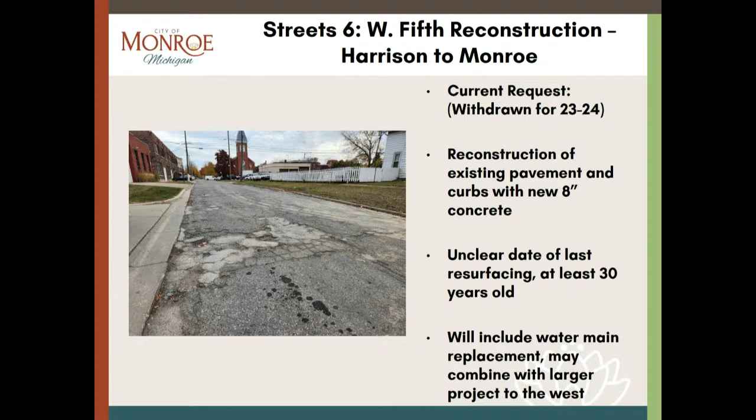We just did 4th Street 2 years ago. We can't tell when this was last resurfaced because I don't have any plans since it was built in the 1920s, but it's pretty clear that's at least a 30-year-old street.

Project number 7 is just an allocation request for design funding. This was intended to be our 2024 federal aid project, and that is East 1st Street from Macomb to Winchester. It was last resurfaced in 2007. The good thing is when we hit these roads on their cycles between 15 and 20 years, we don't have to do a lot of additional work. This one has fairly heavy truck traffic, and while it's not in extremely poor shape, it is starting to alligator along the wheel paths.

This is a project which we clearly are going to be examining for bike lanes, and we do think we have enough room to make that work without taking parking off. So this is one that will be a very key point in that trails plan. We're requesting $50,000 for design funding so we can start working on this within the next fiscal year. We will be pulling forward 24 and 25 funds to do in 2024 for our federal allocation.

Project 8 is one that came up late in the game. I can't quite explain where the money came from, but the best of our understanding is the state of Michigan borrowed some federal funds intended to be spread for the urban area pots for a lot of their construction work in 2022, and returned it for federal aid to the local federal aid committees. So the city had $540,000 roughly in federal funds show up for next year that we were not aware of until sometime in November. That's why this was not in your original packet.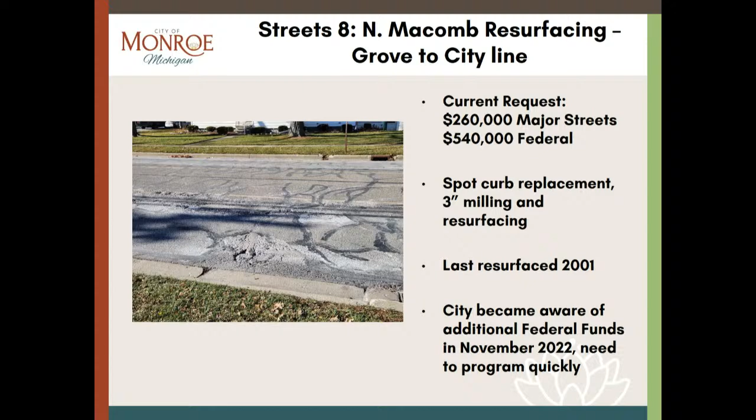We put the mast arms in, and we had to pay for the entire installation because we were reconfiguring the lanes out there. We added a right turn lane, and Holiday was adding a left turn lane, so the state made us realign those heads. Keeping with our design standards that we want to see, we went with the upgrade to that.

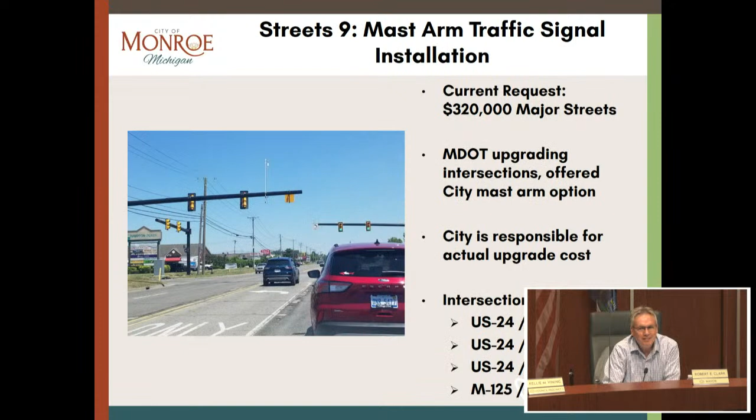Anticipate there'll be further conversation, at least with the council, maybe with the planning commission in their meetings as we go forward on that particular item. I would be surprised if that were not the case. Infrastructure: okay, so these are the other projects that are not necessarily just streets.

The 2023 sidewalk program, this is one we've tried to do every year. We try to continue. The costs just keep going up. I'm really astounded contractors don't like to bid this work. We found a good contractor that actually kind of enjoys it. The request for this year is $250,000 from the streets and trails millage.

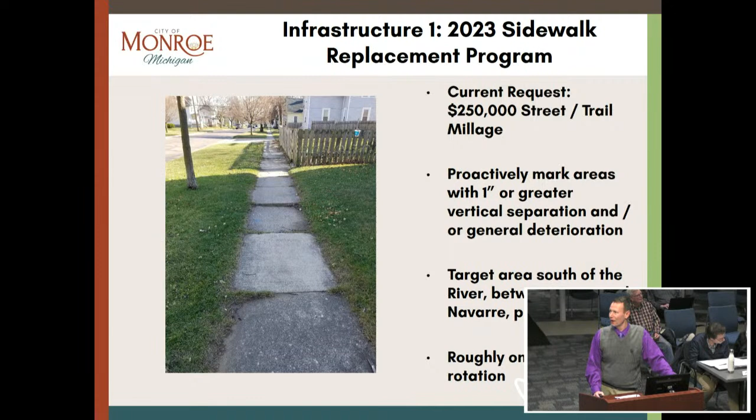We proactively mark areas with an inch or greater vertical separation and/or general deterioration. If it's got one crack, we're not going to mark it. If it's got multiple cracks and if it's more than an inch, we're going to mark it. The target area this year would be south of the river between Scott and Navarre. We actually had to lop that area off of this year's program because the rest of it got so big and expensive, and we're roughly on a 10-year rotation. It's kind of more like 12 when we have to pare this down.

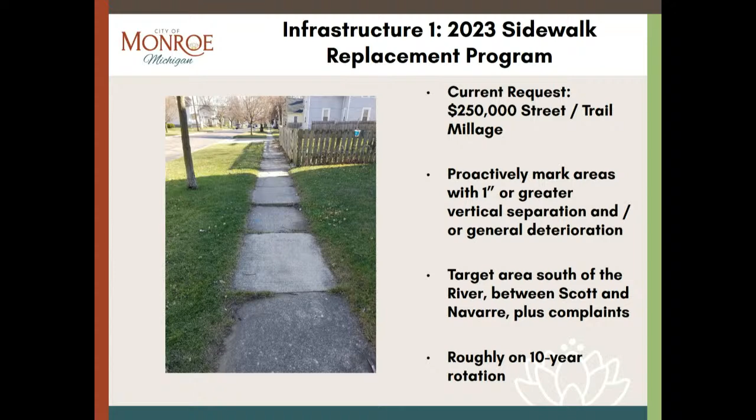We also take complaints the rest of the year, so we'll get spot locations that come in from all over the city, so we have to plan for that. Now that the city is paying for that out of the streets and trails millage, there's no assessment to the property owners. I will say we are tending to get a few more complaints than we used to, when there was a belief that there would be an assessment. So that's where we're going with that.

The second project, and I kind of inserted this afterwards, so my numbering may not fit exactly with what I've got in the original submission, but our second priority would be the Martin Luther King Jr. footbridge rehabilitation. I identified about $400,000 in previous funding. That's not 100% correct because I think we had some rounding error in there, but essentially $400,000 that we've identified before that's going into this, along with $500,000 from the trails millage and a $100,000 contribution from the DDA. The footbridge needs a lot of work.

It was originally built in the late 80s, and we're looking at painting the whole structure, replacing the deck with something other than wood, a new lighting scheme, which we're finding to be fairly expensive, and repairs to the stairway. There's a lot of crumbled concrete on the south approach. The fencing is just chain link attached there; we're looking at something better. And then some minor ADA modifications leading up to it.

So it seems like a $1 million project. It seems like a footbridge shouldn't be a $1 million project, but it's definitely trending that way. So we're looking at probably not being able to get that constructed until 2024.

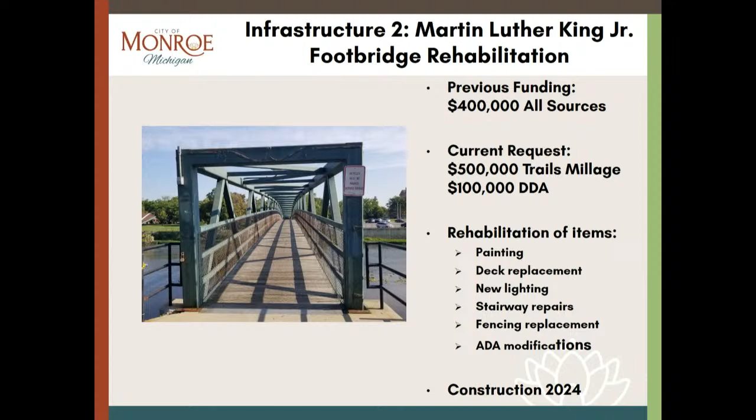Project number 3, this is a trail development program, and I know this may appear in a place other than my infrastructure, but we've allocated in total $50,000 last year, which was intended to be used for just preliminary design, and $400,000 for this coming year. The exact locations and projects have not yet been finally determined, but we want to support the Trails Committee initiatives. We're definitely going to need, if the Loop Trail project goes forward in the next year, some city match on that, so this would certainly be a source of that.

There's other smaller projects within the city we could get going on. We could look at securing easements and properties for the connector into downtown. There's a whole host of things identified on that Trails plan that we can pull from, but they may be $10,000 here, $15,000, $20,000.

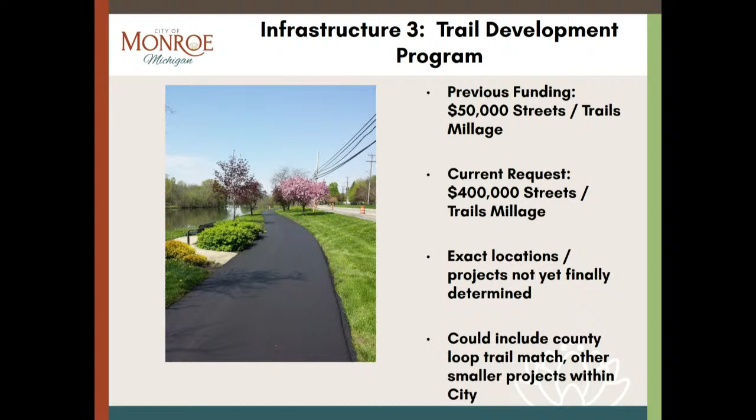Project number 4 is the biggest one we've got in our queue here, but it's also the one that we only have to pay 5% for. Custer Airport Taxiway was built in 2002. It's 5,000 feet long by 35 feet wide, and that's to allow planes to taxi out there so they don't have to taxi using the runway. I identified previous funding on there, which was only $5,200 of city funds.

The current request is $117,000 from the airport fund, which we've been building up for years in anticipation of the project. Airport projects are 90% federal, 5% state, and 5% local, so this one's a little strange.

We're hoping to get it built this fall, but we have to bid the project locally this time due to changes in federal legislation. We bid it locally and then get it approved once we know the dollar amount. A contractor has to hold their prices for 4 or 5 months, and we hope it gets approved. Lately they haven't been approving projects until August or September, so I'll say it's a 2023 project, but it might float to 2024.

Stores and equipment, vehicle and equipment replacement—this is more of a rolling stock kind of thing.

I got a question on the airport. We've had a discussion previously regarding the airport's future in our community—whether or not we want to expand it, whether or not we ever anticipated operating in the black. I know it's difficult to get the airport into that position. Once we make these improvements, is that going to hamper any future plans we may have to expand upon this project? It's the same reason we try to align our water main projects and our road projects—you see what I'm saying?

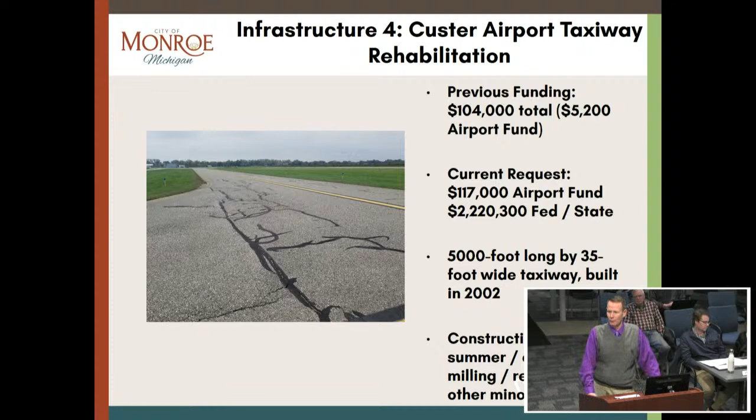And quite frankly, it's not even in as bad shape as any of the roadways I just showed you—not even close. But as we all know, aviation facilities need to be held to a higher standard because of the risks involved with landing a plane on a runway or taxiway that might have chunks come out of it.

No, I think it sounds like a great deal for us. I just know we have a pending plan here on the long-term future of the airport, and it would be a shame to make this kind of investment and then have to go back and say this didn't really fit into what we need to do to make this feasible in the long term.

That's my concern. This is resurfacing a facility we presently have, so unless we have an idea of what other things we're going to do—there was a long-term plan a long time ago, I don't want to get too much into it tonight since the hour is getting late, to move the runway, shift it, allow for larger jets, things like that. I don't think anyone's interested in pursuing that at present, so this project does certainly facilitate anything we would want to do at this point.

Question for the city manager: have we allocated funds up to this point in time on an airport master plan? I think we do have some funding for the master plan update, don't we?

I say this fully understanding that the airport is not your first, second, or fifth priority in terms of the things you have to do day-to-day. No, and I would like it to be higher. I would like to get to a point where we can make it higher because it's an asset we could utilize. But that's a conversation maybe for another day as far as operational challenges and where we need to go.

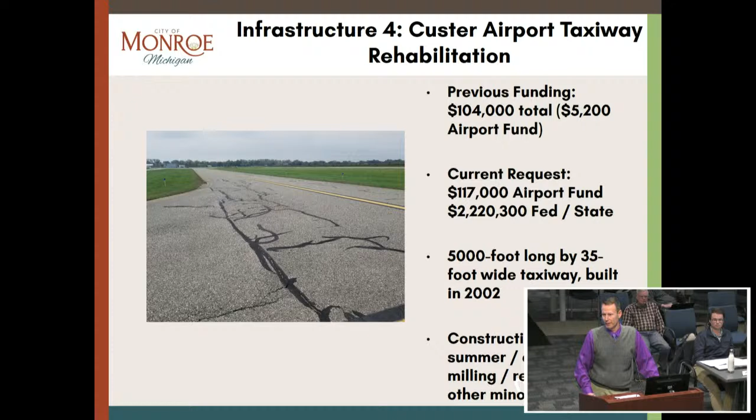Okay, thank you. All right, moving on to our rolling stock, if you will. We have $750,000 in the request for Stores and Equipment Fund replacement.

So we're looking at financing that against the Stores and Equipment Fund revenues, which we receive whenever we use the equipment. We get an hourly rate if it's used on major street, local street, that type of stuff, and we rent our equipment to the respective departments, including our utility departments, on a monthly basis. Not the heavy equipment for utilities, but the light-duty vehicles. So that's where the Stores and Equipment Fund makes its money.

Other purchases we've got in there, we'd like to get a new loader for DPS, and we always budget the police aftermarket items, things like cages for the back seats, light bars, that type of thing. So that's where the money is for that. I won't belabor that too long. Again, that's something council will have further discussions on regarding the forestry unit, because it relates to the operating budget as well.

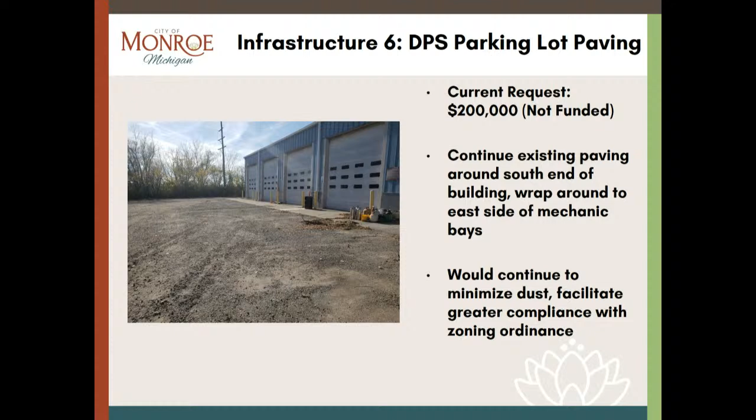Project number 6 was not funded. We removed that; I had requested it just to look at it. We've paved the west side of the DPS property on Jones Avenue. This is the east side, and the south part, the loop around, is currently unpaved. We would like to pave it up to our maintenance garage on the south end, so we'd be wrapping around. It just didn't hit a high enough priority, so it was not recommended for funding at this point, but the city manager asked that we include projects that were not funded as well.

City employee parking lot. This is another one we didn't fund, but we did fund $50,000 for design activities. Future funding is about $350,000 for construction. This would be reconstruction of the entire lot, addition of landscaping and pedestrian paths. That is not a parking lot that is compliant with our zoning ordinance, for example. We have no landscaping, no delineated aisles, and the parking stalls are too narrow. We'll probably lose 20 to 30 parking spaces when we make this compliant with our zoning ordinance, but it needs to be done. I started here in 1998, and I can remember the lot looking a little rough already back then, so it's due.

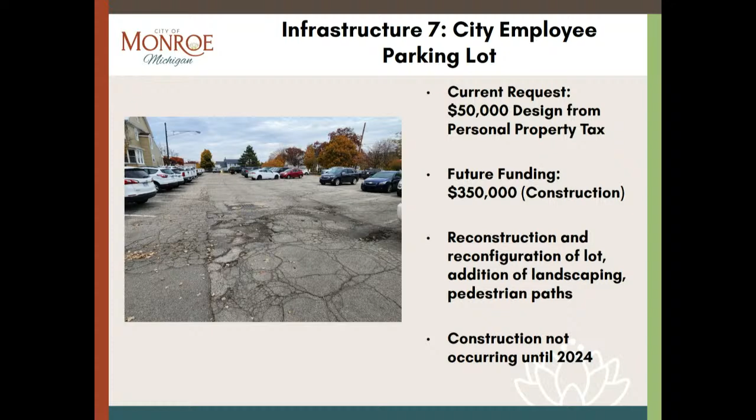But we want to put the needs of some of our more high-profile projects first, those that have more broad community appeal, if you will, but this has to be done fairly soon.

Project number 8 sort of rolls in with the St. Mary's Park project. I had requested it thrown in the parking lot in there just to identify a ballpark cost on the lot itself. That's $600,000. We elected, the Capital Improvements Committee administratively recommended that we roll this project into the overall park project and allocate about $350,000 for design of the whole thing.

So certainly we won't be able to construct it till 2024, but this is another parking lot that will not be as big as it is when we're done with it because we don't want to have that sea of parking along the river. There needs to be a river esplanade, if you will, at least. So there's about 200 parking spaces, I believe, in this lot. It's a hefty number.

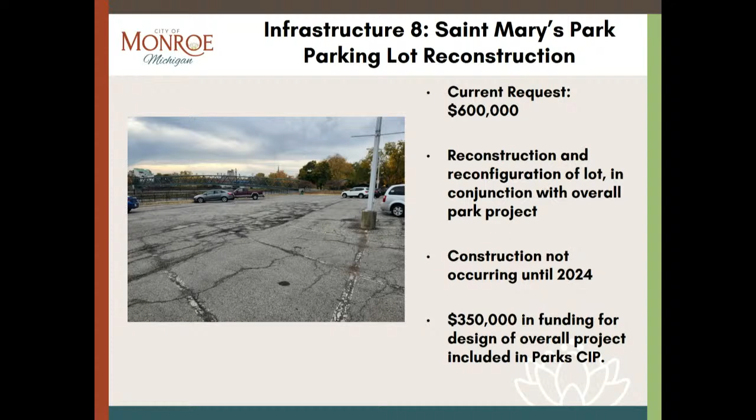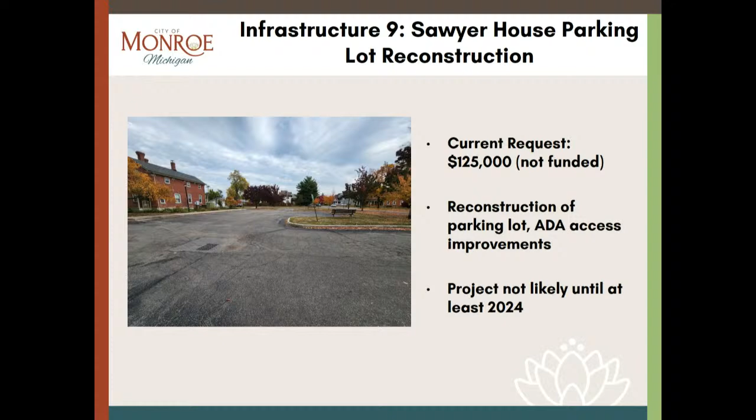Project number 9 is one that we put in there just to look at that because we were looking at parking lots. This is not as high a priority as the other ones, but when we do it, it'll be relatively cheap compared to the others. That's the Sawyer House parking lot. This one could certainly go another year or two, but we have some ADA improvements we need to make in the sidewalk ramps going up to the building and probably reconfigure where those ADA spots are in the parking lot when we do it. Long-range projects, which I have a few on here.

Streets, we've got about $17 million over 5 years, so $3.4 million a year. We'll do almost 12 miles during that time frame, which is about close to 2.5 a year. 45 different roadway sections across the city. We continue to address mostly overdue full rebuilds with curbs. About half of this comes from the street millage, so had we not had this, we'd be twice as far behind.

2027, we start to see where a large number of the projects are mill and fills. There are no curbs, so we think in a few more years we'll be through the cycle of deferred curb projects. So we want to continue to be aggressive, take advantage of pricing and interest rates versus future years, although I can't tell you where we'll be in a few.

Other infrastructure, $13.6 million over 5 years, which is other non-streets, so a little bit under what the streets projects are. We've got another airport project in there, and that's the runway rehabilitation, which is scheduled for a couple of years out. Again, the state's going to be giving us a giant pile of money for that beyond our entitlement. That's not in terribly poor shape, but again, it's higher standards, so they're going to subsidize it and give us that kind of money. We're not going to object to it.

Each year, we've got about $300,000 set aside for sidewalks and trails. $2.5 million show up in my long-term plan, but we'll have to square this away in the actual year of construction. $2.5 million for those downtown geometric modifications, and that's going to be subject to the traffic study that we're looking at. OHM is working on a proposal for us right now. That's where those design costs will come in that were allocated that you saw in Mr. Cochran's presentation. But we've got the construction cost identified in the future year, and that's a wild guess for right now.